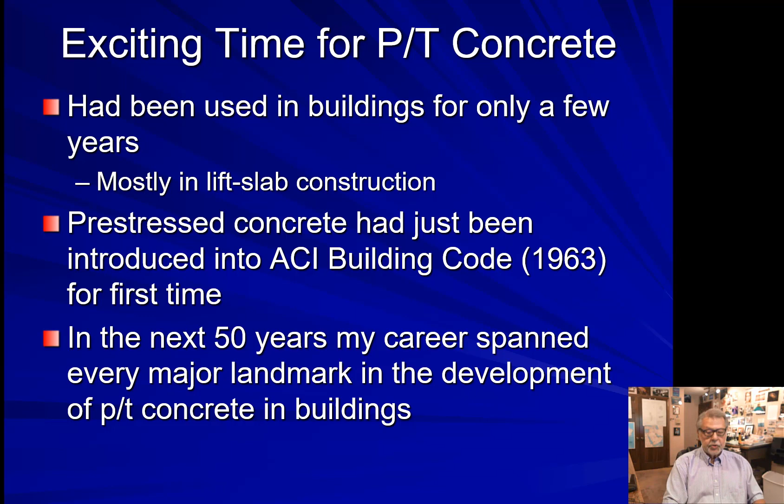It was an exciting time in post-tension concrete. It had been used in buildings for only a few years. The first post-tension buildings were in the mid-1950s, so a little less than 10 years before, and it had been used mostly at that time in lift-slab construction, which we'll talk about later. Prestressed concrete had just been introduced into the ACI Building Code, the 1963 edition, for the first time. As I said, in the next 50-plus years, my career has spanned every major landmark in the development of post-tension concrete in buildings.

It's interesting that the American post-tensioning industry owes its existence to lift-slab construction. The first lift-slab buildings in the United States were built in the mid-1950s, and they used non-prestressed slabs. In lift-slab construction, the first thing that's done is that the columns are erected full height, and they were either steel or concrete.

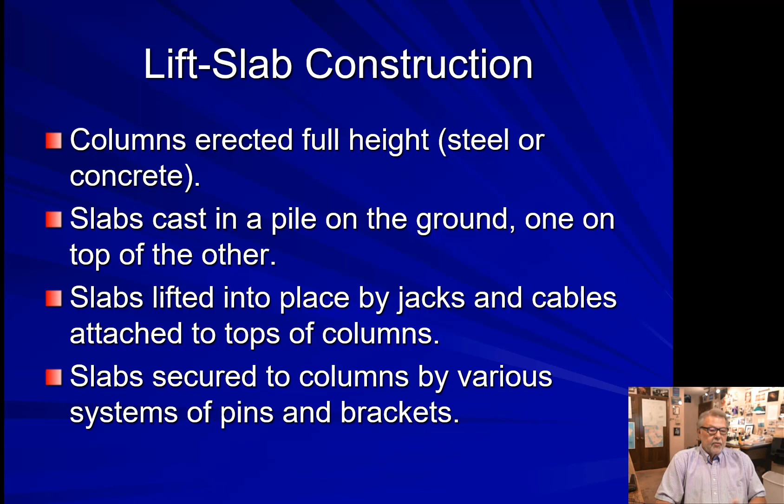The slabs were cast in a big pile on the ground, one on top of the other. Then the slabs were lifted into place by jacks and cables that were attached to the tops of the columns. Then the slabs were secured at each level to columns by various systems of pins and brackets.

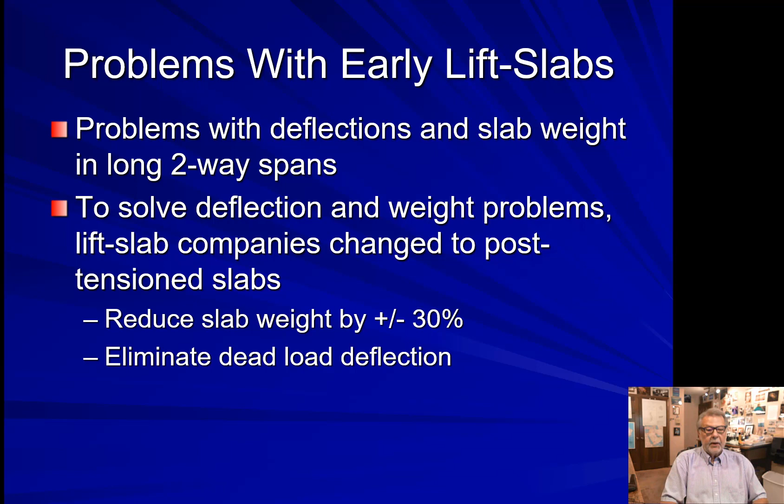It was a highly successful type of construction with a few exceptions. There were problems with deflection and slab weight in the long two-way spans. To solve the deflection and weight problems, the lift slab companies all decided to change to post-tension slabs, because the slab weight would be reduced by about 30%, and it would eliminate most of the dead load deflection.

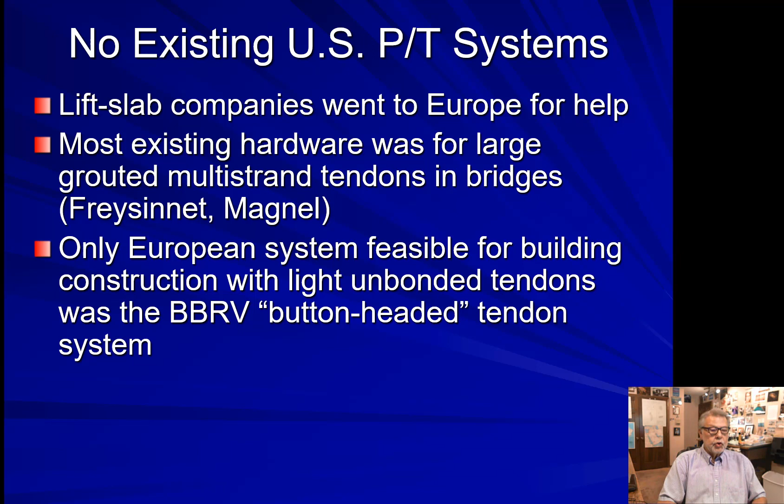The problem was there weren't any existing American post-tensioning systems. The lift slab companies therefore went to Europe for help. Most of the existing European hardware was for large grouted multi-strand tendons in bridges, like the Freyssinet system and the Magnel system. The only European system that was feasible for building construction with light unbonded tendons was what was called the BBRV button-headed tendon system. The B, B, R, and V stood for four Swiss gentlemen who collectively invented the button-headed tendon system. And thus we entered into the button-headed tendon era.

Each lift slab company returned from Europe with a license to market the button-headed tendon system. Some independent companies like Prescon, Ryerson, and a few others also obtained button-headed tendon BBRV licenses just to market the post-tensioning system itself. Here's what it looked like—it was a monstrosity. It consisted of a grouping of quarter-inch diameter wires. They conformed to ASTM.

They were quarter-inch diameter wires, 240 KSI ultimate strength. The wires passed through a steel bearing plate, and then through a circular stressing washer, which was externally threaded so the jack could grab onto it. The wires had cold-formed buttons banged onto the end of them in a mechanical process by impact, and that would hold the force. It would develop the force in the quarter-inch diameter wires against the stressing washer.

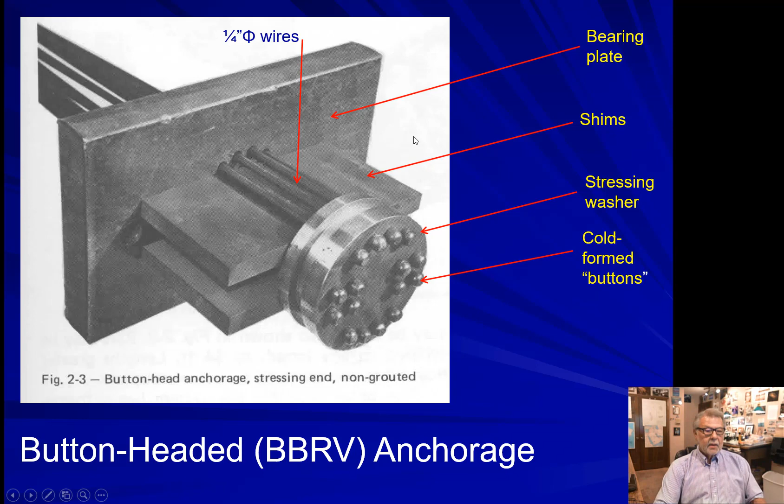Now, you'll notice a couple of potential problems with this anchorage. It solved deflection problems, but the button-headed tendons created other problems. Because both the stressing and dead-end anchors had to be attached in the factory, that required exact length. There was no tolerance for adjustment if the length between forms was wrong.

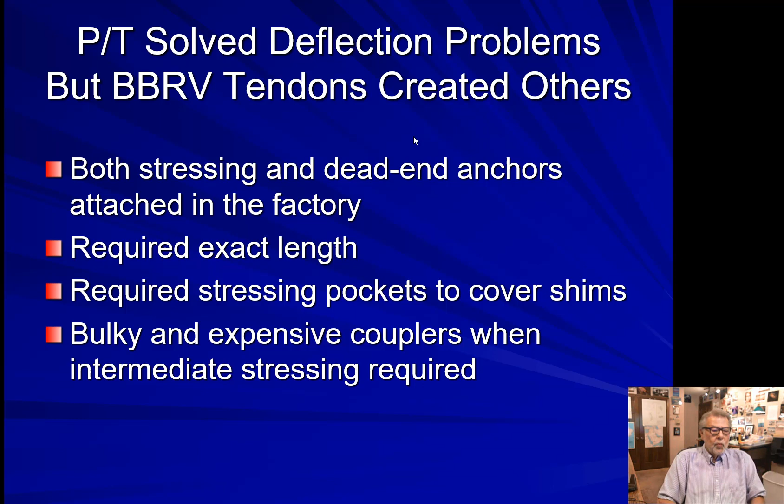They also required stressing pockets to cover the shims. The anchorage couldn't be placed outside the slab; it had to be placed inside the slab and then later covered with either a continuous pour strip or a stressing pocket. It also required bulky and expensive couplers when intermediate stressing was required.

The first strand post-tensioning system was introduced in 1962, developed by one of the most famous names in the history of concrete construction in this country, Edward K. Rice, Ed Rice. He was president of T.Y. Lin and Associates at the time, and T.Y. Lin consulted for precast companies, which all, of course, used 7-wire strand for their pre-tensioning steel.

The strand post-tensioning system was introduced by Atlas Prestressing Corporation, a company I went to work for in 1965, at which time Ed Rice was president of Atlas. He was also president of T.Y. Lin and Associates. The strand system did not require precise length.

The tendons could be cut several feet longer than the concrete length. They did not require stressing pockets, and I'll show you a picture of why that's true. They did not require couplers. If intermediate stressing was required, which it was on almost every project, the intermediate anchors could just be slid onto the strand. The strand was cut the full length of the building, and the anchorages were just slid on to the intermediate stressing point.

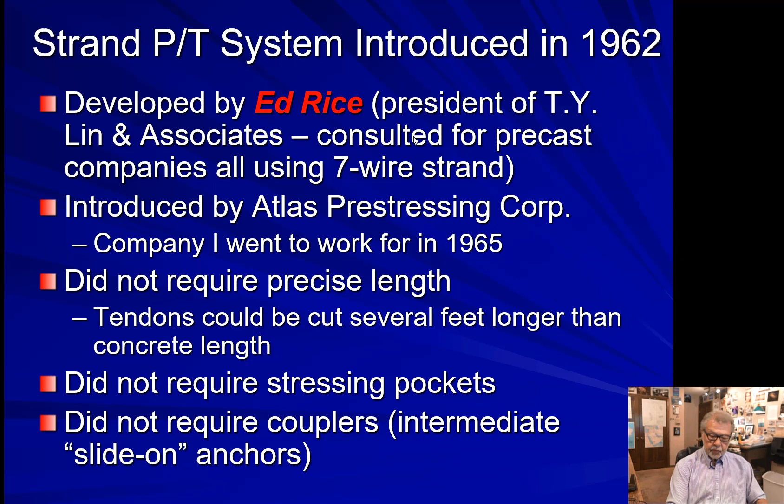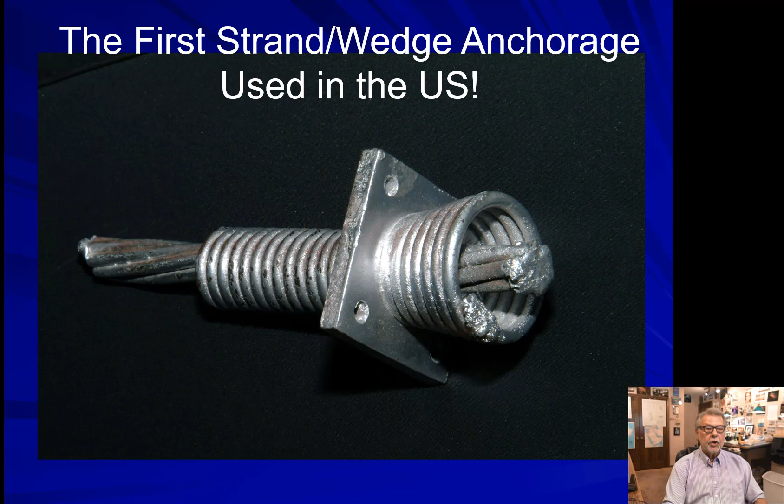The force in the cable is held by two cone-shaped wedges with teeth that penetrate the strand, the 7-wire strand, and the force in the strand is then resisted in bursting by the coil of wires. It's kind of an unusual design, and I think I've talked to Ed about how he came up with it, and it had to do with some large coil-type anchors used by Freyssinet in Europe at the same time. Nonetheless, this was the very first strand wedge anchorage ever used in the United States.

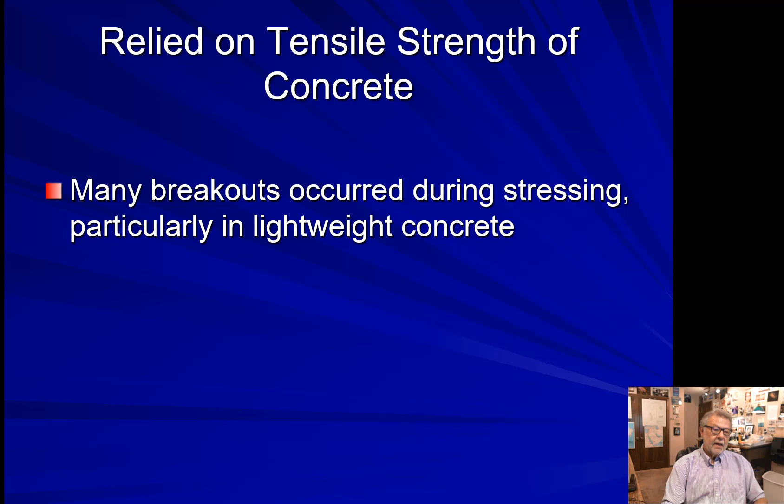Since it relied on the tensile strength of concrete, there were tons of breakouts that occurred in the early days of wedge post-tensioning with the coil anchorages. That was particularly true in lightweight concrete, which was prevalent in building construction at that time.

I remember in the early Atlas days, we would often gather after work and discuss the events of the day. Our field superintendent, Tom Anderson, would often come in and join us, and he would invariably be bruised and bloodied from fixing all the breakouts that occurred during the day. And he would say, referring to the coil anchors, those damn things should be chained together.

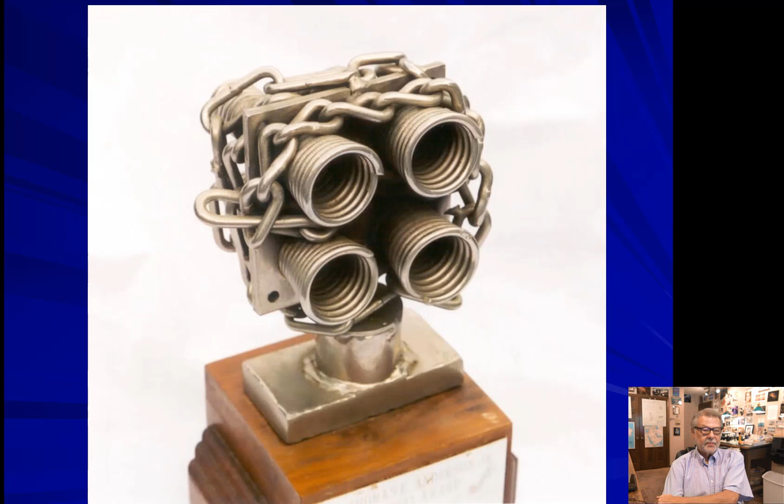Well, that kind of caught on, and it led to the Thomas E. Anderson Memorial Award, which for a number of years at Atlas was presented to the Atlas Employee of the Year at the annual Christmas party. We got a kick out of that. I don't think Ed appreciated it very much, but the Atlas employees enjoyed it.

We had to develop a bearing type anchorage, and that was done primarily by an Atlas employee named Dick Martyr, along with help from Hal Long, president of Atlas. This was the very first ductile iron casting ever made and used in the United States. It was first used in 1963 by Atlas.

It was kind of interesting. We had a basic rectangular shape, 2 inches by 5.5, which gave a gross area of about 11 square inches, less the holes, and that was adequate for stressing at about 3,000 psi. It incorporated the tapered hole, which accepted the wedges. That rectangular shape was designed so it could be used in very thin slabs. There were a lot of 5-inch slabs being used in parking structures at that time, and this 2-inch dimension worked beautifully in a 5-inch slab.

We got what I thought was a brilliant idea to manufacture these things in groups. There was a single shape, a double, the H222, 322, 422, and mostly for beams, we had a group of castings that would accommodate 5. The iron workers used to just love this because you could place a 522, 5 anchorages, for about the same cost as a single anchorage. But it never caught on, and to my knowledge no one has used multiples since Atlas in the 60s.

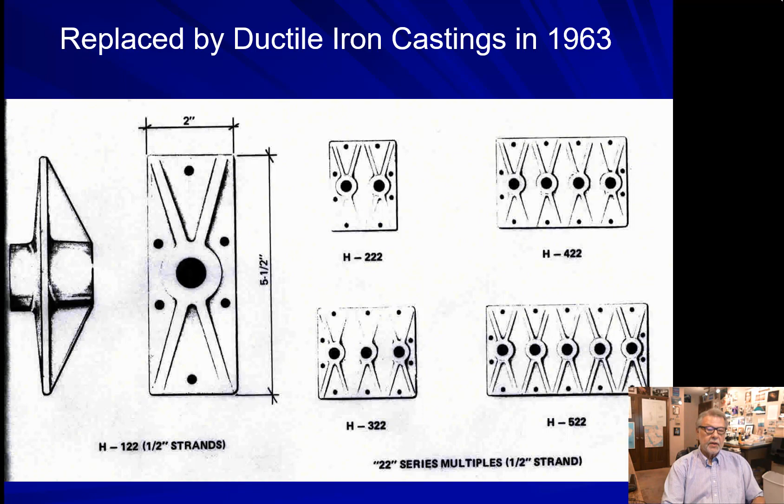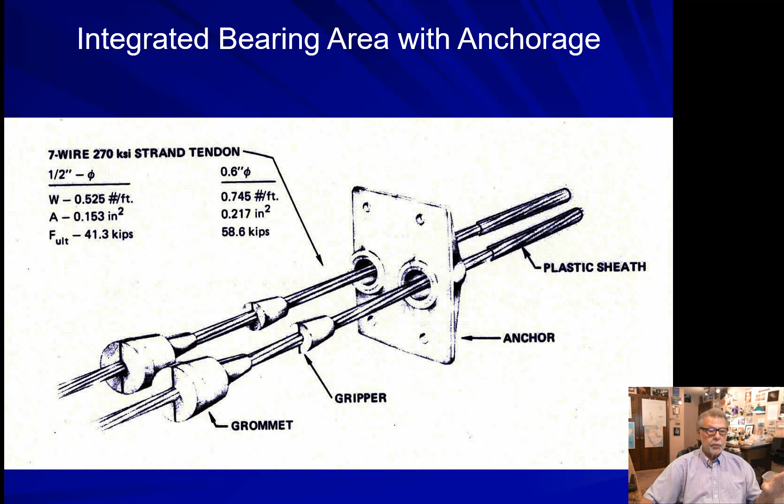Here's what the system looked like. The 7-wire strand passed through the anchorages. The strand was greased and plastic sheathed. These are the grippers, very similar to grippers used today. Our stressing pocket we called a grommet. It was a 2-piece rubber assembly, not the single plastic piece used today, but two pieces. We thought it was easier to handle that way. That never caught on either, but the rest of it did.

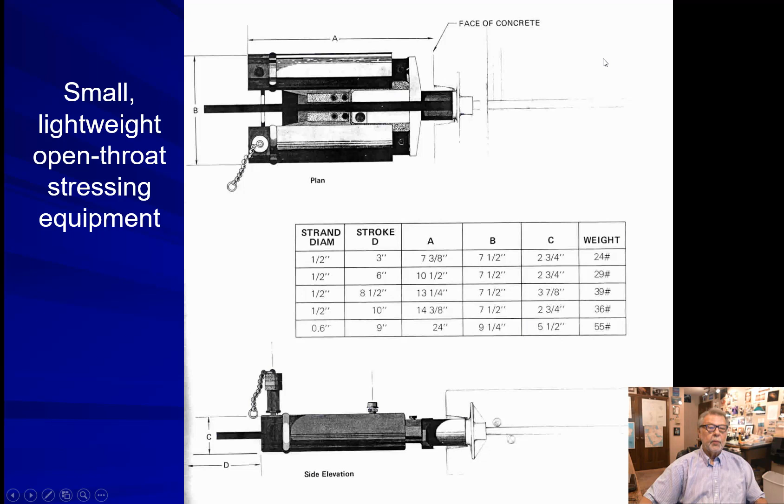We used small, beautiful, lightweight open throat stressing equipment, most of it developed by Dick Martyr for Atlas. You can see how lightweight it was. The typical stroke was 8.5 inches, and it only weighed 39 pounds, so it was easily handled by one iron worker. Again, it was open throated so it could be attached to the strand at any point along its length.

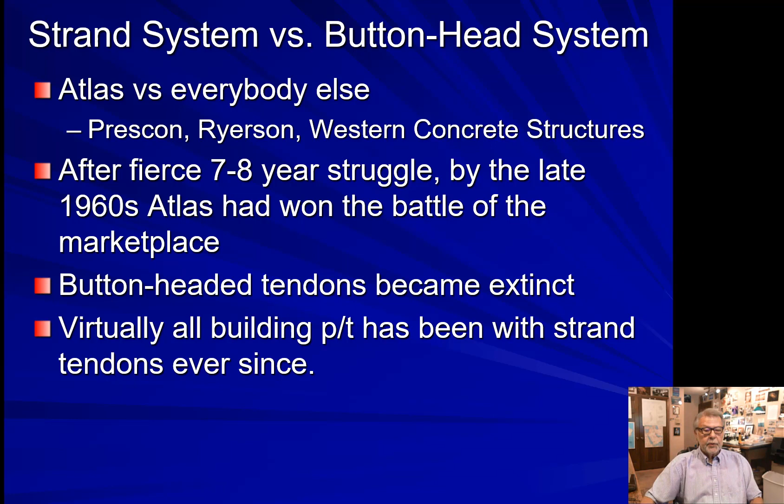For a while there was a vicious commercial battle between the strand system, used by Atlas, and the button-headed tendon system, used by everybody else, including companies like Prescon, Ryerson, and Western Concrete Structures. But after a very fierce, nasty 7 to 8 year struggle, by the late 60s we at Atlas had won the battle of the marketplace, and button-headed tendons became extinct, never used again. Virtually all building post-tensioning has been with strand tendons ever since the late 1960s.

It's interesting to note what happened to lift slabs. I said the post-tensioning industry owes its existence to lift slabs, but we hardly ever see any lift slabs anymore. The problem was one of greed. The lifting companies all had a license to market the button-headed tendon post-tensioning system, so they combined the lifting and the tendons in their bids.

That excluded independent post-tensioning companies that were not lift slab companies, like my firm, Atlas Prestressing Corporation. We couldn't bid on a lift slab job. So independent PT companies were shut out on every lift slab job.

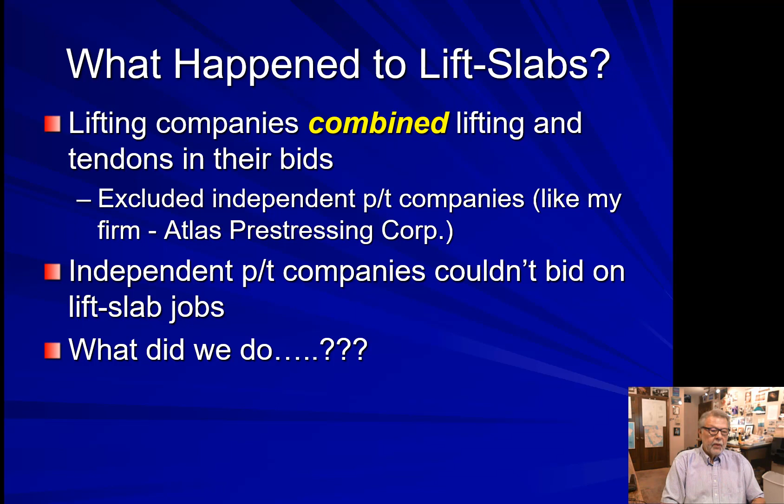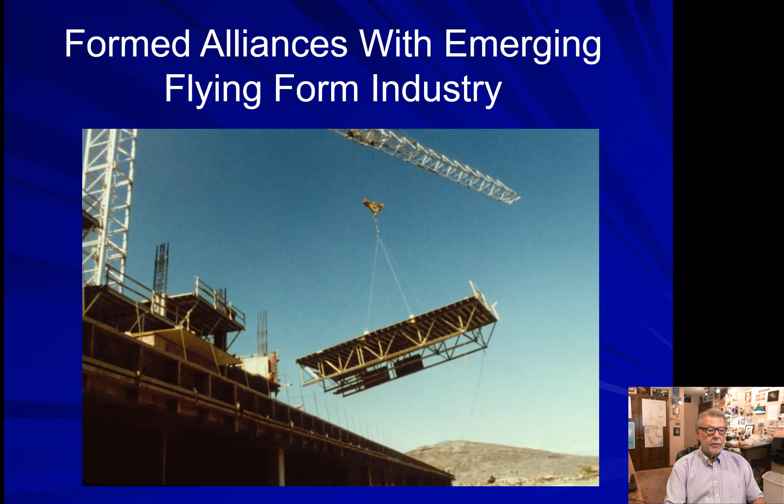What did we do? In one of the better business decisions ever made, we formed alliances with what was at the time the emerging flying form industry. I remember a big, wonderful company called Formies, based in Albuquerque, and we developed a very close relationship with them. Along with very progressive concrete contractors, between post-tensioning companies, flying form companies, and progressive concrete contractors, we could jointly compete directly with lifted buildings.

Cast-in-place post-tension buildings using large panel flying form systems became highly competitive with lifted buildings, and by the late 1960s, cast-in-place buildings became preferred, and lift slab buildings became virtually obscure.

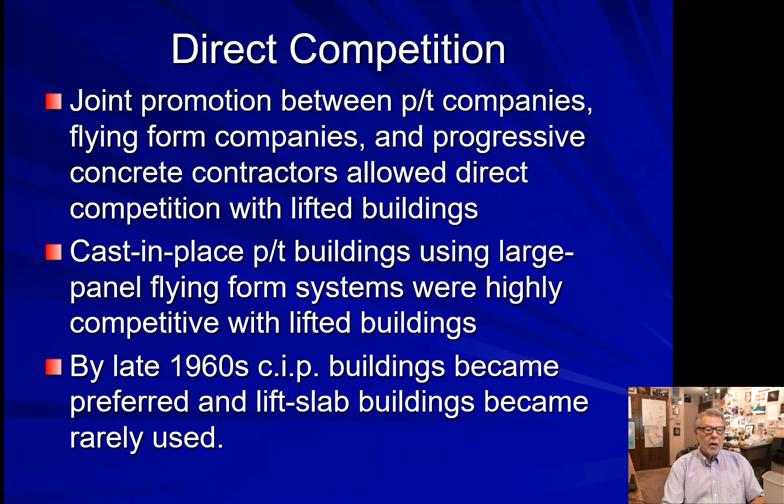I think it was a very short-sighted decision on the part of the lift slab companies. If they had not originally tried to exclude independent post-tensioning companies, it's possible that large panel flying form systems would never have been developed or refined to the extent they are today. And I believe lift slab construction would be a significant factor in today's medium-rise building market. There are some complications in that.

There were some very serious lift slab accidents during construction that may have affected that statement, but I still believe it to be true that lifting was an excellent method of construction. It eliminated forming, which is one of the largest costs in concrete building construction.

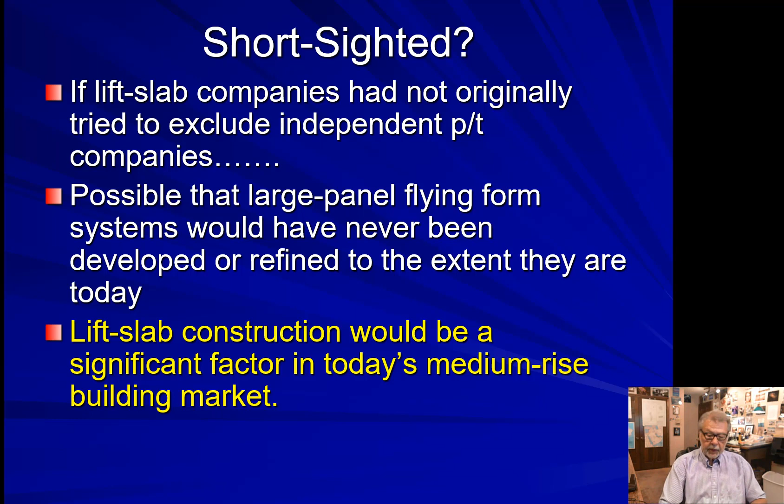Interesting to know how much post-tensioning has been done in the United States. Based on tonnage statistics from the Post-Tensioning Institute that started in 1972, and reasonable estimates of what happened before that, there have been about 5 billion square feet of building construction done in the United States with unbonded post-tensioning. Assuming about 100,000 square feet per building, that means there are about 50,000 post-tension buildings in the U.S., most of which are still in service. And that doesn't include bridges, earth applications, or residential foundations, which is the largest application of post-tension tendons in the country, larger than all other applications combined.

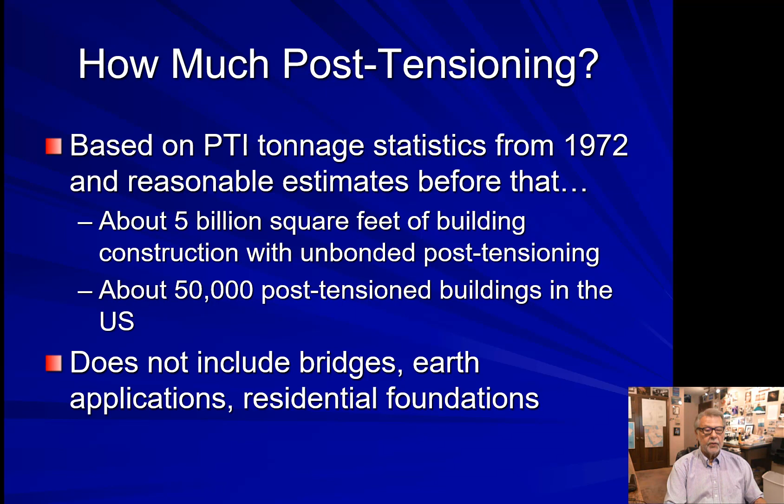Looking back over my half century in the post-tensioning industry, I would say the following are the major landmarks that contributed to the growth of post-tension concrete in buildings. First, the introduction of the strand system, which replaced the button-headed tendon system. Next, the development of the ductile iron casting for single-strand unbonded tendons. We've talked about both of those.

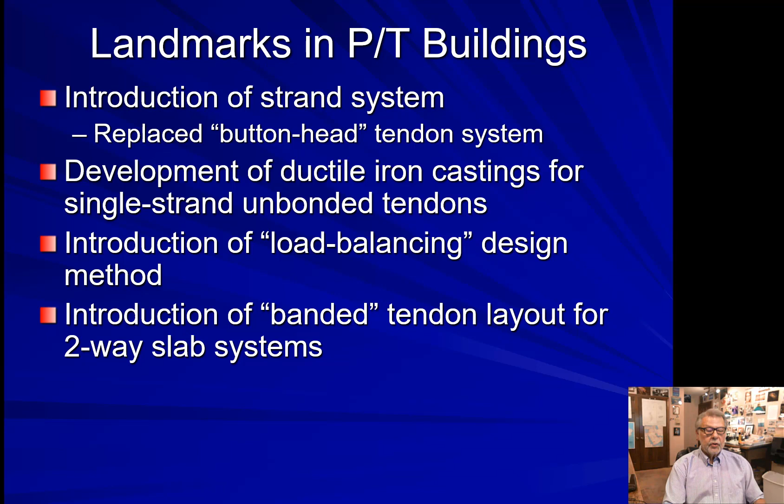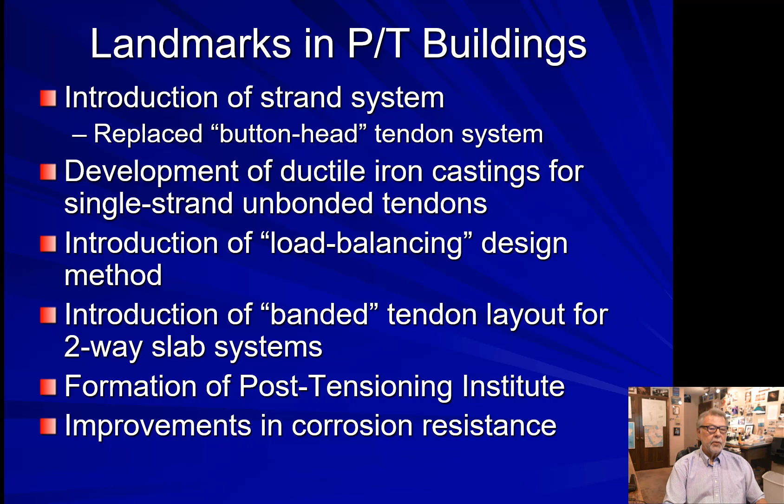Third is the introduction of what was called the load balancing design method, done by T.Y. Lin in a paper that appeared in an ACI journal in 1963. Next came the introduction of the banded tendon layout for two-way slab systems. Finally, the formation of the Post-Tensioning Institute, a tremendously important landmark in post-tension buildings, which led to great improvements in corrosion resistance—the biggest problem the post-tensioning industry ever faced.

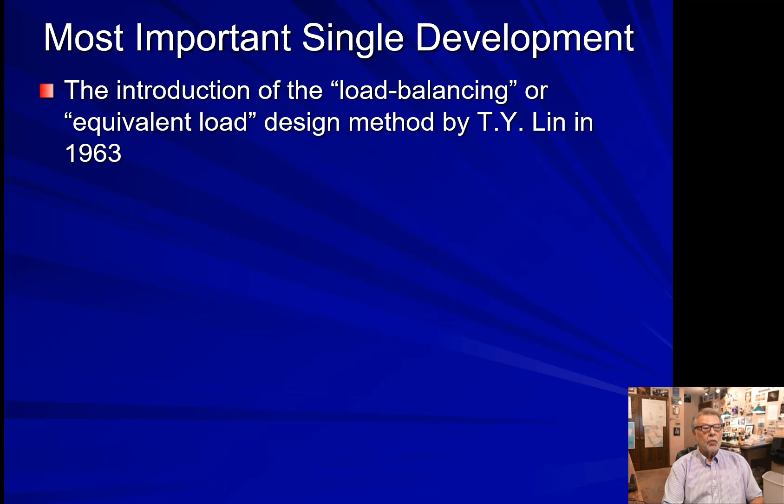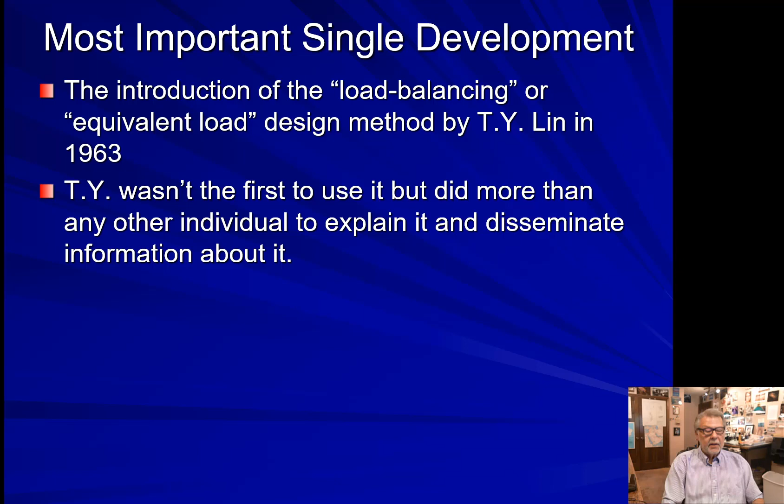What's the most important single development? That's a tough one, but all things considered, I believe the most important single development or landmark in the growth of the post-tensioning industry in the United States is the introduction of the load balancing method by T.Y. Lin in 1963. It's also called the equivalent load design method. T.Y. wasn't the first to use it, but he did more than any other individual to explain it and disseminate information about it. It made the design of prestressed concrete as easy as the design of non-prestressed concrete.

The tendons became just another load. Once you remove the tendon and replace it with the loads that it exerts on the concrete, now you've just got a concrete member with a system of loads. Some of them go in unusual directions, but they're still just loads. That made a huge difference for designers, and it encouraged the selection of post-tensioning as the preferred structural system.

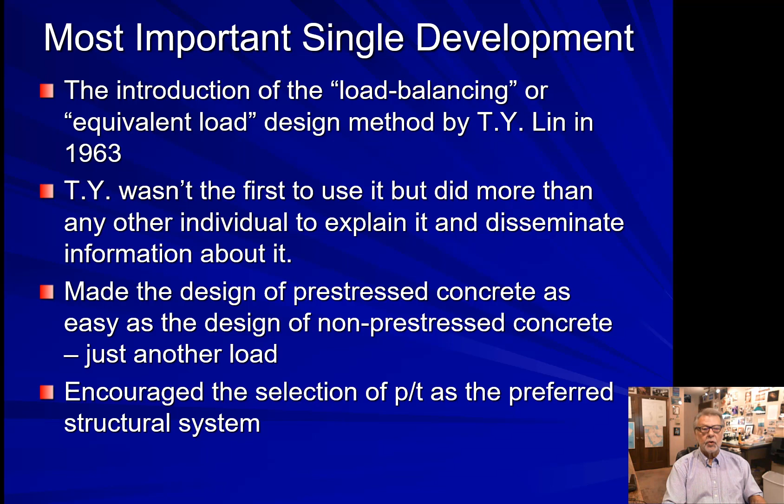Building codes, of course, are extremely important. Structural engineering is one of the few professions in the world that is completely governed by laws—no other profession that I'm aware of is completely governed by laws, but structural engineering is. Post-tensioning was virtually absent from the 1971 version of the ACI building code, ACI 318-71. In fact, in that code, the structural engineer was told to ignore secondary moments. It's the only code requirement I'm aware of in my entire career that requires a violation of statics.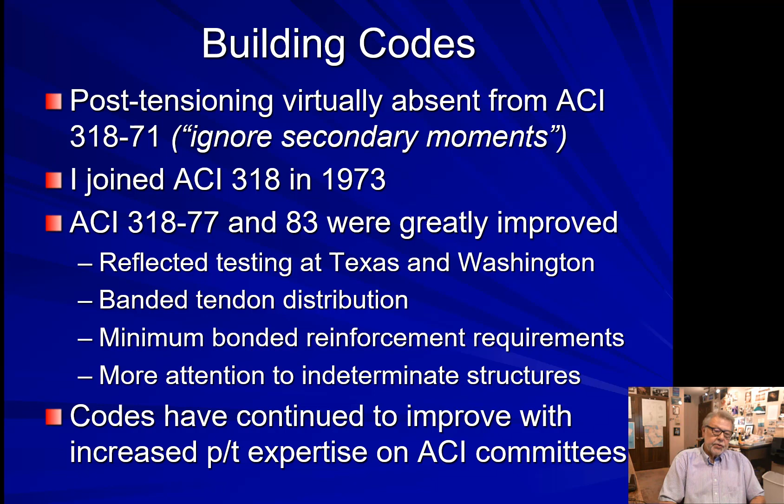I joined ACI Committee 318 in 1973. Partially because of my influence, the next two codes were greatly improved, in '77 and '83. They reflected testing on banded two-way slabs at the University of Texas, and post-tension beams with both unbonded and bonded tendons at the University of Washington. They addressed the banded tendon distribution, minimum bonded reinforcement requirements in both beams and one- and two-way slabs, and paid much more attention to indeterminate structures, which includes most post-tension members. The codes have continued to improve with increased expertise on ACI committees.

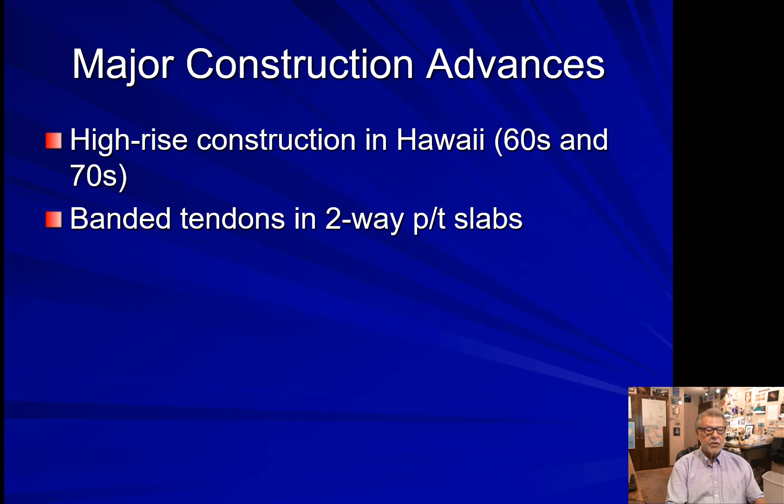I consider several major construction innovations and advances to have occurred during my career, and perhaps the two most significant were what happened in high-rise construction in the state of Hawaii in the 1960s and 70s, and of course the introduction of the use of banded tendons in two-way post-tension slabs.

Here's the reason—timing was just everything. At that time, there was a huge input of foreign investment. Both China and Japan started to look at Hawaii as a very favored vacation spot, and they wanted to cash in on the opportunities for providing hotels and condominiums in the islands. So there was a tremendous construction boom in the islands at that time.

It was a very slow time on the mainland, but it was booming in Hawaii at that time, both in high-rise hotels and condominiums. The faster you could get these buildings completed meant the quicker you could get them rented or sold, and that meant more revenue.

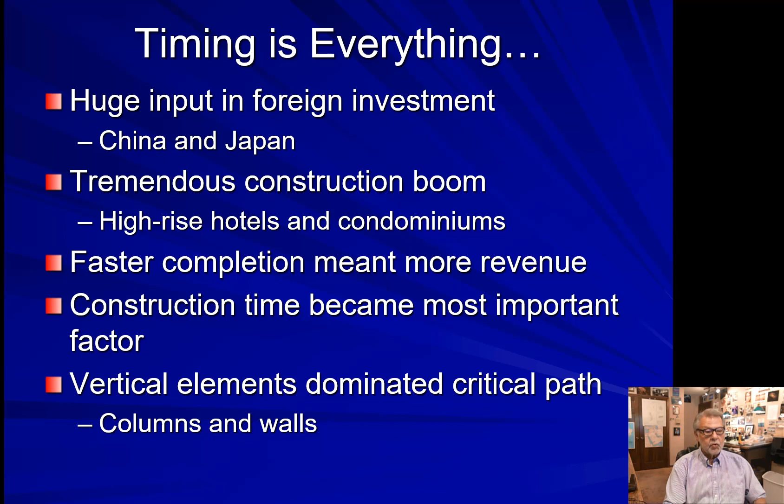So construction time became the most important factor, certainly top of the list. Now in these high-rise buildings, the vertical elements, the columns and walls, dominated the critical path. You couldn't build the next slab until the columns and walls were completed to the soffit of that slab. So what's the solution? Build the columns and walls out ahead of the floors. And thus the era of jump forms and flying deck forms arose.

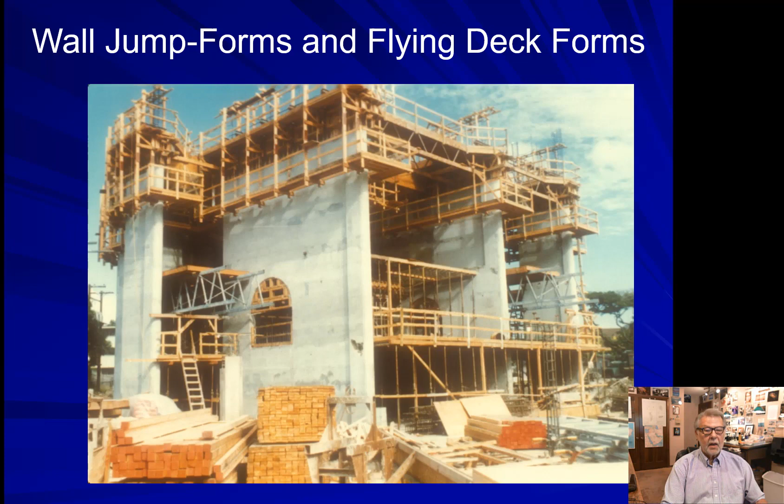This is a multi-story building just starting out in construction. You can see none of the elevated floors have been cast yet, but the walls and columns are up about 3 levels. How do we do it?

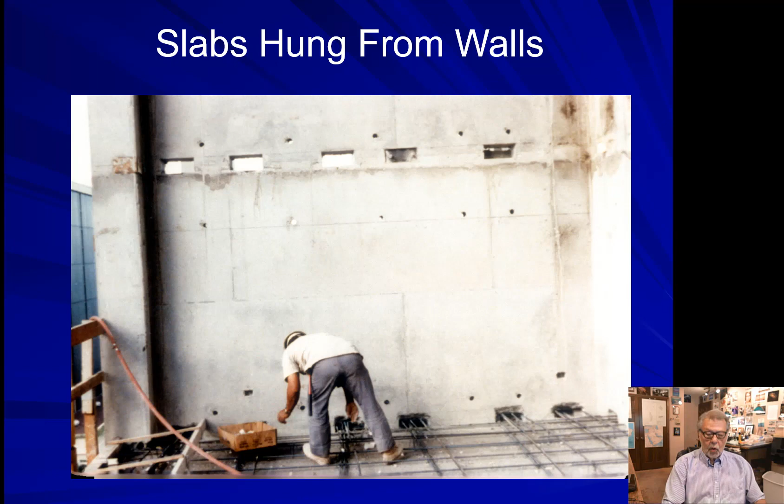Well, we hung the slabs from the walls. We provided holes — the Hawaiian word for a hole is a puka. We provided pukas through the wall through which the slab reinforcing passed, and that was fully adequate to support the slab from the walls after the walls had been erected above the slabs.

With this type of construction, we could actually get the schedule down to 3 days per floor, which was spectacular. In a typical schedule, the slab concrete would be placed on a Monday morning. The walls and columns, remember, are 2 or 3 lifts above. The tendons would be stressed on a Tuesday morning, one day. Oversized 4x6 anchors were used to allow stressing at 1500 psi, which we could achieve in 24 hours.

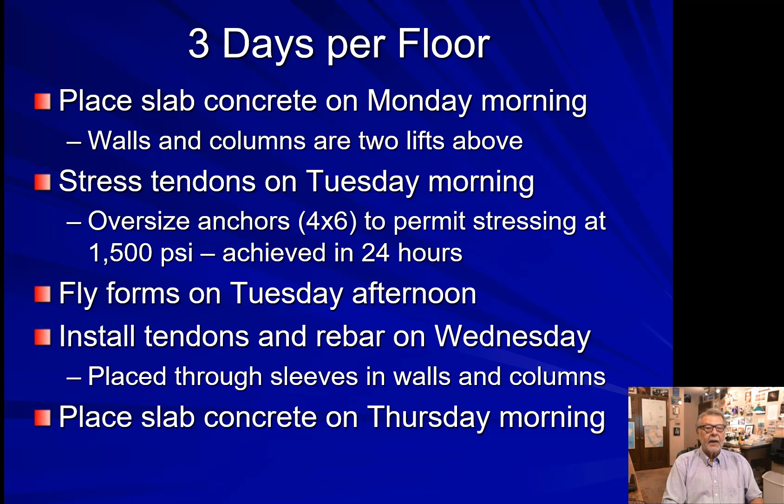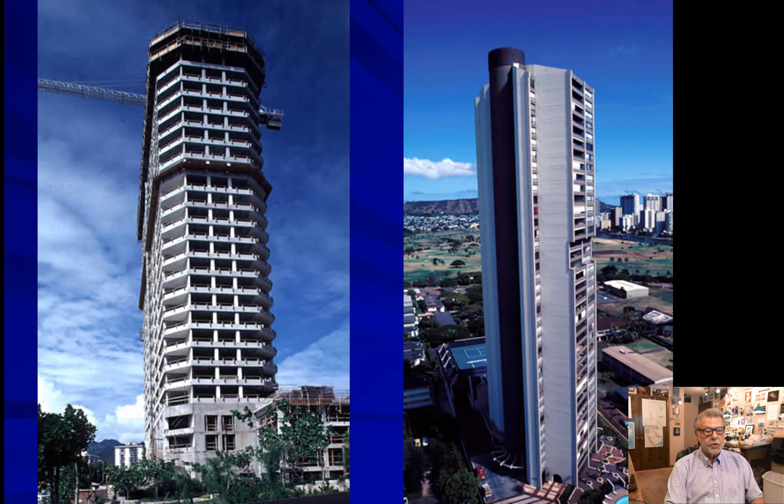The forms would be flown. Once the deck is stressed, it's structurally adequate, so the forms could be removed and flown Tuesday afternoon, set above the stressed slab. The tendons and rebar would be installed on the next slab Wednesday morning, again placed through sleeves in the walls and columns. The slab concrete would be placed Thursday morning — Monday, Tuesday, Wednesday, Thursday, a 3-day cycle. We did a bunch of beautiful multi-story buildings in the 40 to 50 story range in Honolulu in that time period, all using some type of jump form, slip form system where the walls and columns were built out ahead of the slabs.

The next major construction advance was the introduction and development of the banded tendon system in two-way slabs. It's interesting, it was first used in the most famous post-tension concrete building ever built — not because it's post-tension, but because of what happened there. It's the Watergate Apartments in Washington, D.C., completed in 1968.

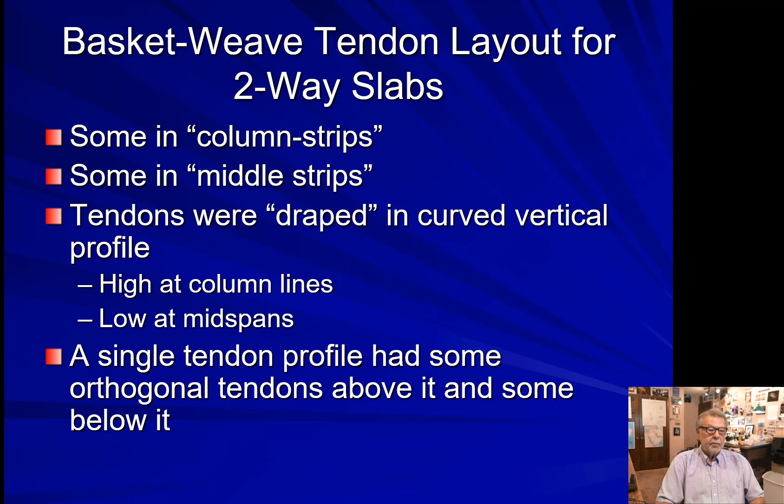At that time, a system called the basket weave system, a tendon layout, was being used for two-way slabs. Some tendons were in column strips, an imaginary strip centered on the column. Some were in middle strips, the area of the slab between the column strips. The tendons were draped in a curved vertical profile, high at the column lines and low at midspans. So a single tendon profile had some perpendicular tendons above it and some below it.

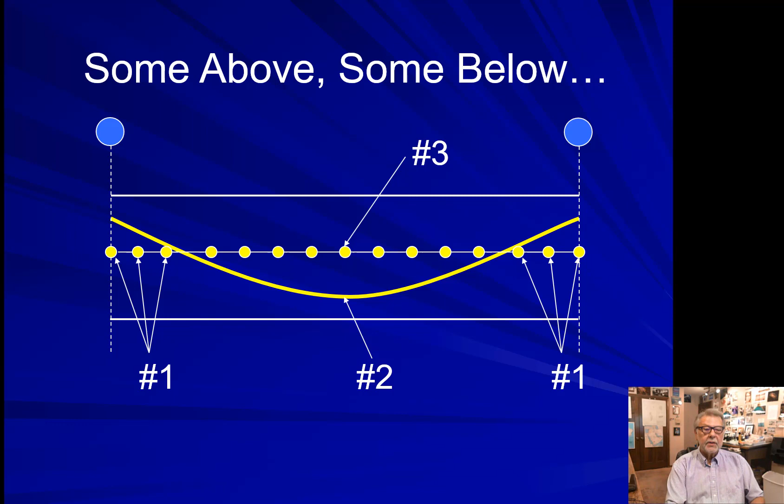And this is what that looked like. In this section, the tendons near the column at any one point in the slab would have only tendons above, meaning they were sequence number 1 — they had to be placed first. Then the tendons in the perpendicular direction that passed directly above sequence 1 but below sequence 3 had to be placed — that was sequence number 2. Then the rest of the tendons were sequence number 3. You had to place them in this sequence or you couldn't chair them properly — you'd get a bird's nest of chairing.

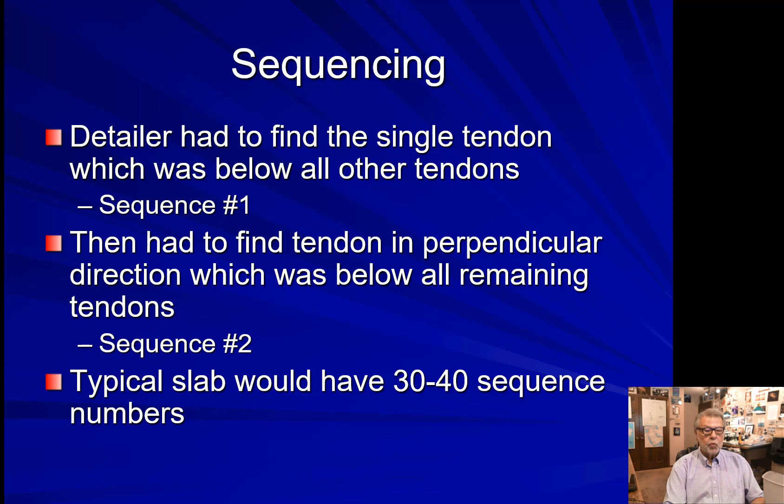So the detailer in that time period with the basket weave tendon system had to find the single tendon which was below all other tendons — that was sequence number 1. Then he or she had to find the tendon in the perpendicular direction which was below all the remaining tendons — that was sequence number 2. A typical slab, even a relatively simple one, would have 30 to 40 sequence numbers.

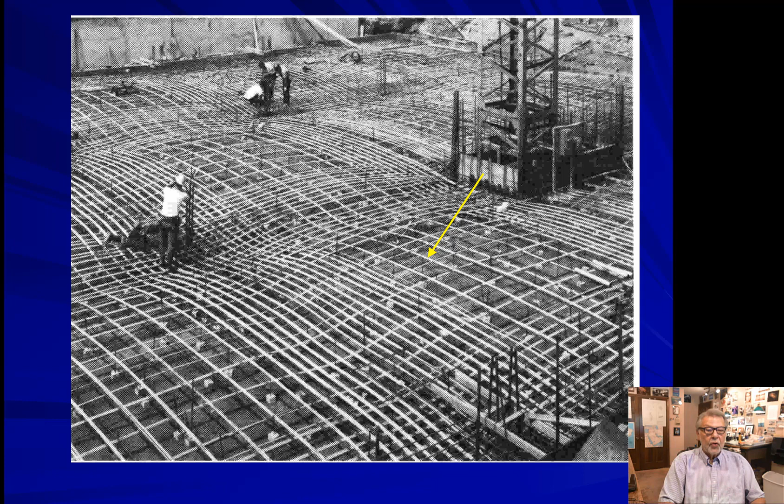Again, the tendons had to be installed in a precise sequence, and any error in the placing sequence resulted in a bird's nest when it was chaired. You'd have to pull the tendon out and rethread it.

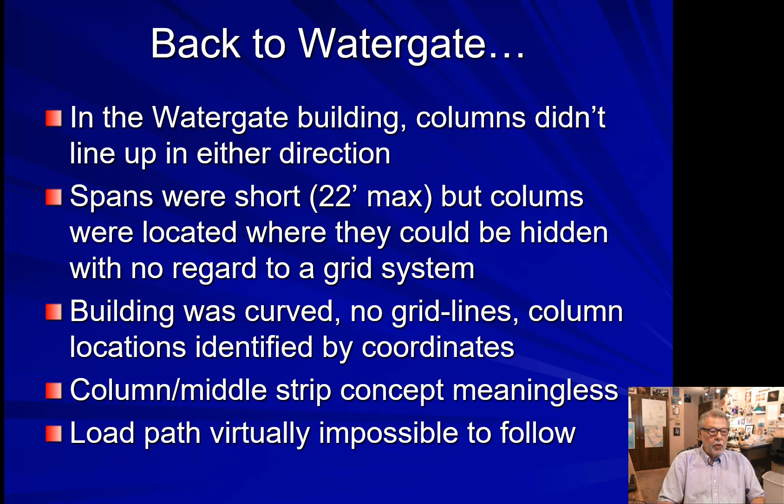Back to Watergate. In the Watergate building, the columns didn't line up in either direction. The spans were very short, only about a 22-foot maximum span, but the columns were located where they could be hidden with no regard to a grid system at all. The building was curved to further complicate it, so there were no grid lines. The column locations were actually identified by coordinates in Watergate. The column middle strip concept, of course, was meaningless, and the load path was virtually impossible to follow.

So what did we do? The slab design engineers were a conglomerate of T.Y. Lin and Atlas Prestressing Corporation. It was a design-build project.

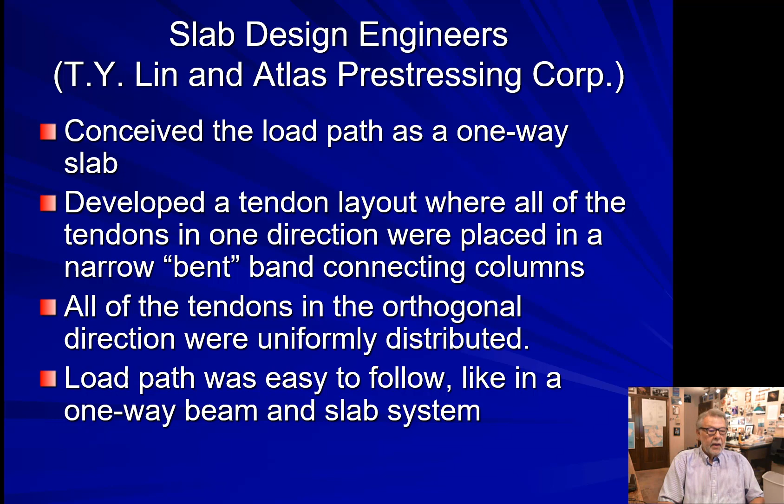We conceived the load path in the only way we could, as a one-way slab. We developed a tendon layout where all of the tendons in one direction were placed in a narrow, bent, curved band connecting columns, like a beam. And all of the tendons in the orthogonal direction were uniformly distributed. Now the load path was easy to follow. It was really just like a one-way beam and slab system. It worked. It was scary, but it worked.

And it had a number of fringe benefits. It resulted in a substantial savings in labor costs. The placing contractor, the tendon and rebar contractor, was ecstatic about it. He said that, of course, it eliminated tendon sequencing. All the band tendons get installed first, then all the uniform tendons get installed next.

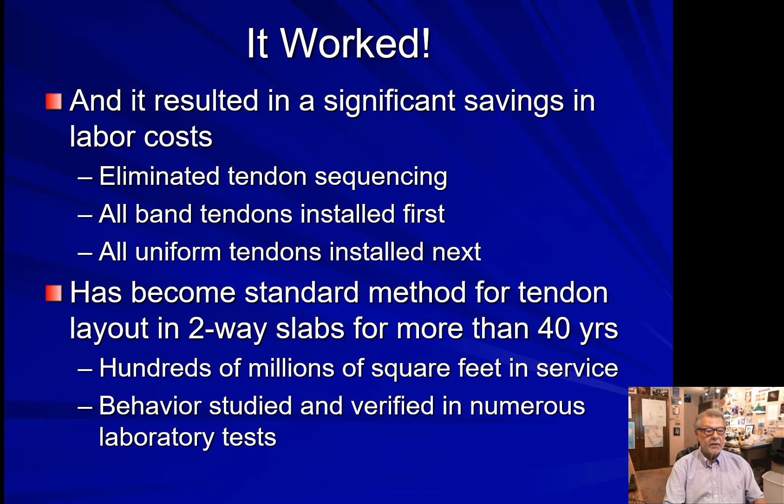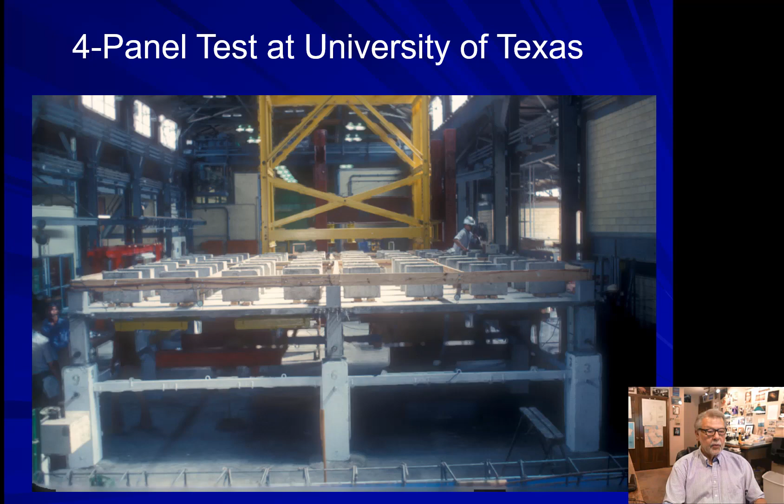This was a picture I took in the early 70s of a 4-panel test at the University of Texas at Austin, conducted by the famous and revered researcher and professor Dr. Ned Burns.

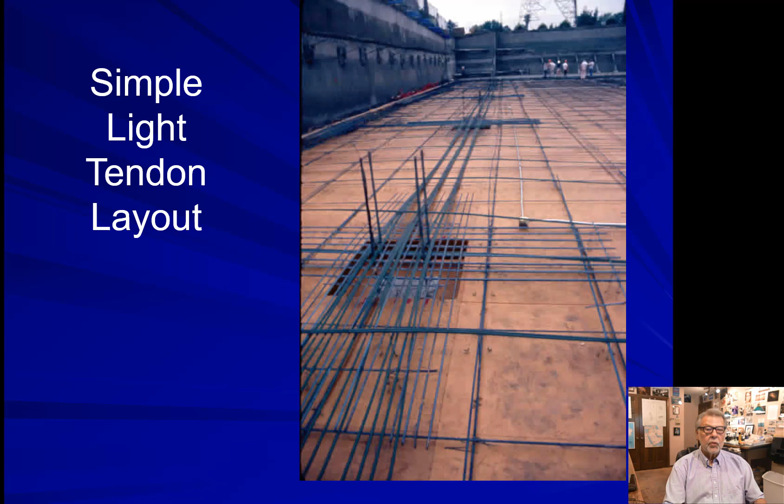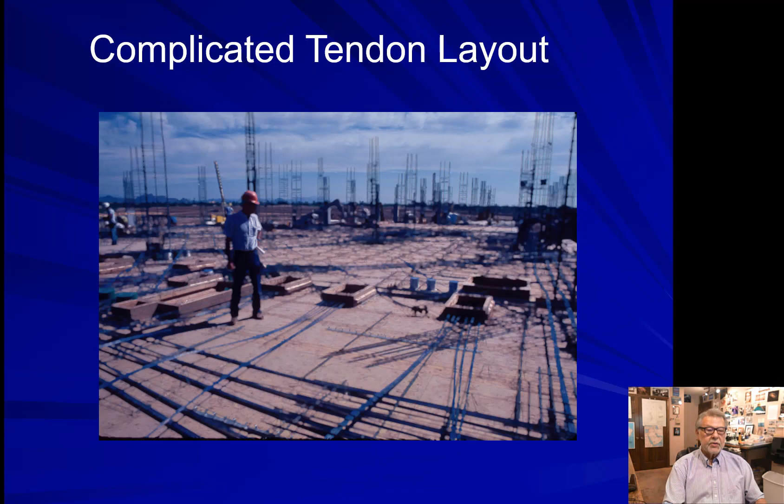Now, I like this one. No discussion of the history of post-tension concrete could possibly be complete without a discussion of the use of computers in post-tension concrete design. When I graduated from UCLA in 1963 and started my first job with T.Y. Lin and Associates, this was my primary mathematical tool.

It was a slide rule. It could multiply and divide, but it didn't know where the decimal point was. I had to figure that out.

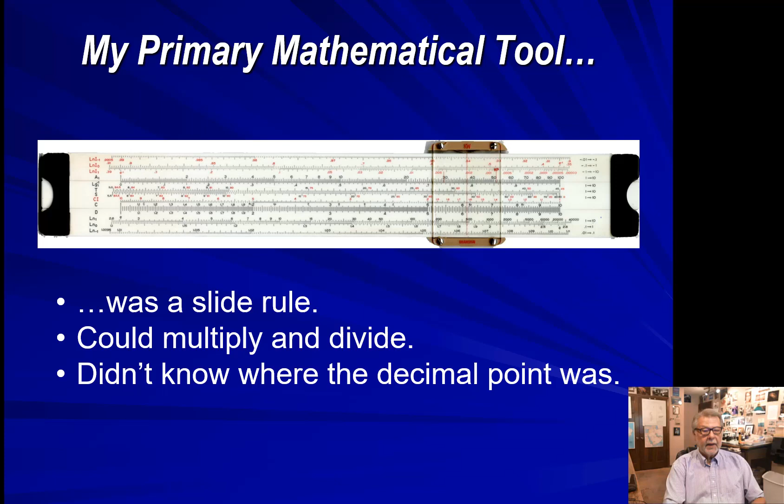Now I can do a dynamic analysis of a 40-story building on a flight between San Francisco and Los Angeles on a laptop computer about the size of a book while sipping a glass of Cabernet. I'm just kidding. Of course, I'd never do that. It would probably be Merlot. No, with all the decimal points in exactly the right place.

This was my first introduction to machine-assisted calculations. This was the Olivetti Programma 101, which was introduced in 1966. I was with Atlas at the time.

We did a tremendous amount of design at Atlas, along with supplying the tendons. We recognized that the most effective way to market post-tensioning was to teach engineers how to design it. So we had a large staff of over 100 licensed engineers at Atlas, and we would provide both design-build services and design assistance for structural engineers in their office.

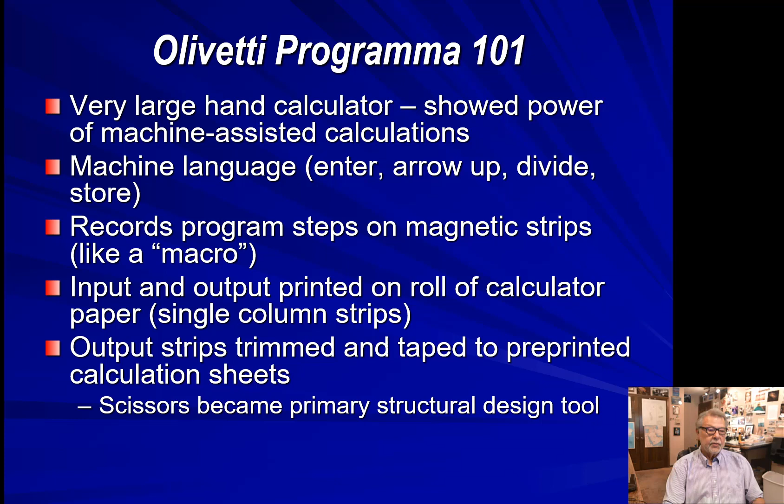Here's what our pre-printed sheets would look like. Note this was done in 1972, and I had the audacity to call this a computer example. This was from Atlas.

We would pre-print the variable titles on the calc sheet. There was a calc sheet for a beam and for a slab. For example, in the upper left hand corner, we would have the load criteria, the slab thickness, the width of slab, the depth, the tributary - all of the important variable parameters for the slab.

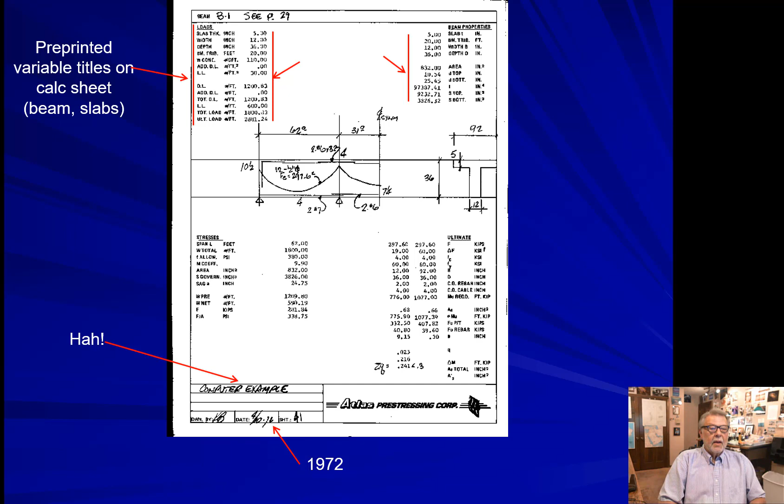Then we would run the calculations on the Olivetti. We would trim the paper output and glue or tape it to the pre-printed calculation sheets in the proper form. Again, this was a big improvement over doing calculations by hand.

The next major landmark in computers was the introduction of the Wang 700 series, called computers, in 1970. It was a very large supercalculator, still machine language - enter a number into the X register, arrow up to the Y register, do something, store it. It could record the program on audio cassette tapes, which had much more capacity, but it was read-only - you couldn't write to the tapes. It had more registers, places to store stuff, and you could print with a modified IBM Selectric typewriter, so you had the advantage of columns and a much prettier format.

With the Wang 700, we could write a crude analysis program in a series of independent routines. The answers and some of the repeated input from one routine had to be used in the next routine, so there was a lot of reuse of numbers. It was not a design program.

You couldn't do a true design. You had to do a series of analyses to get to a design answer. You would input a first guess at geometry, force, and profile. The machine would perform an analysis, calculate stresses and rebar. If you weren't happy with that, you'd change something and do the analysis again, iterating to an acceptable design.

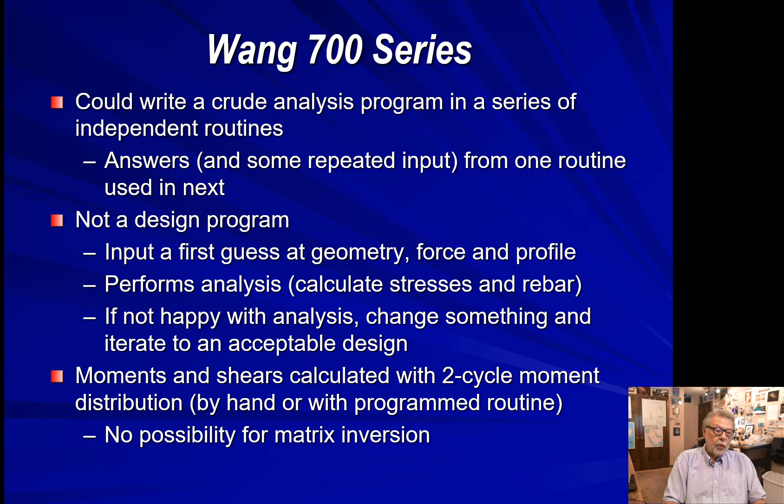The moments and shears were calculated with a 2-cycle moment distribution routine, either by hand or with a programmed routine. There was, of course, no possibility for matrix inversion.

The first real personal computer appeared in 1973 - the Wang 2200. It had, for the first time, a basic language, a basic interpreter. Now we could do loops, decisions, if this then. It had a mighty 4 kilobytes of RAM, so it required tedious programming.

You would input some data, do some calculations, print the answers with a Selectric typewriter, delete the unneeded data, input some more data, and do some more calculations. So it was tedious, but again, it was better than doing it by hand.

The program code was recorded on audio cassette - read-only. The output again was printed on 8.5 by 11 sheets with a modified Selectric typewriter, which meant we could use tabular format with alpha headings. The output became much more usable, and all subsequent programming became easier. If you could program the Wang 2200 with 4 kilobytes of RAM, you could program anything.

1981 changed the world. IBM came out with the first personal computer, the PC. It had 2 floppy disk drives, a monitor, and you could print to a dot matrix printer. It allowed you to read and write to the 2 floppies. It had 64 kilobytes of RAM, a processor speed of 4.77 megahertz, did not have a hard drive, and it did have a basic programming language which was developed by Microsoft.

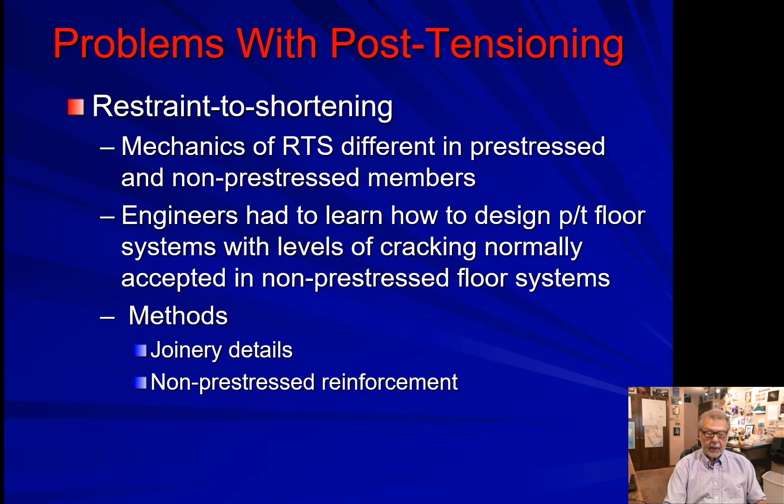It was not mathematics. Math didn't solve this problem. The thing that solved the shortening problems were joinery details like slip joints and pour strips, and the effective use of non-prestressed reinforcement that would distribute the cracking that did normally occur.

But by far the biggest problem that has ever been faced by the post-tensioning industry is tendon corrosion. The early sheathing and grease was inadequate for the aggressive corrosion environments—environments primarily where de-icing salts are applied to the concrete, or in ocean environments.

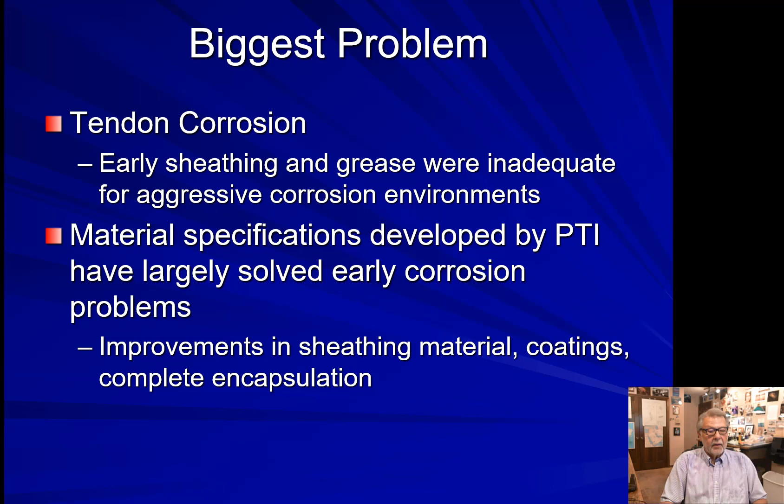Now, improved material specifications developed by the Post-Tensioning Institute have largely solved the early corrosion problems. That includes improvements in sheathing material, in coatings, and finally the complete encapsulation of the tendon.

What's in the future? Well, from my standpoint, after 50 years, what I've been doing up to this point is looking backwards. Now I'll take a little look into the future. I think there are two major things that I see that will change the post-tensioning industry in the future.

The first is the strengthening of existing buildings with externally applied post-tensioning tendons. It's a very green concept. It involves retrofit of existing buildings versus replacement, and that extends the useful life of a building, which fits well into our world of sustainability.

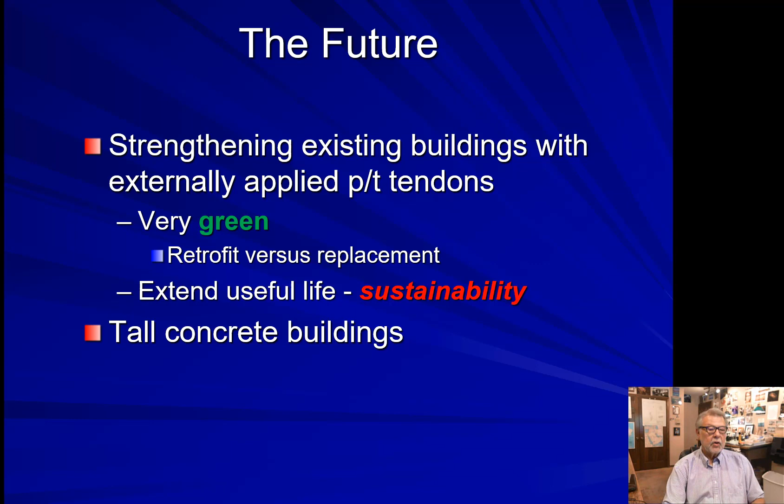The second thing that I see in the future, a huge area of growth, is in tall concrete buildings. Strengthening with external post-tensioning is really exciting—it's a fantastic area. Our firms have completed over 70 projects with external post-tensioning.

They have been very, very successful, and in many cases they saved the building from being demolished. External post-tensioning systems involve building a king post truss under the structure.

We drill through the existing structure, and apply what we call a saddle, which is a structural steel assembly, at the point where we want to apply the beneficial load to the structure.

We string the tendons through the holes that we've drilled, below the saddle. Once the tendons and the saddles are in place and all the anchorages are in place, we stress the tendon.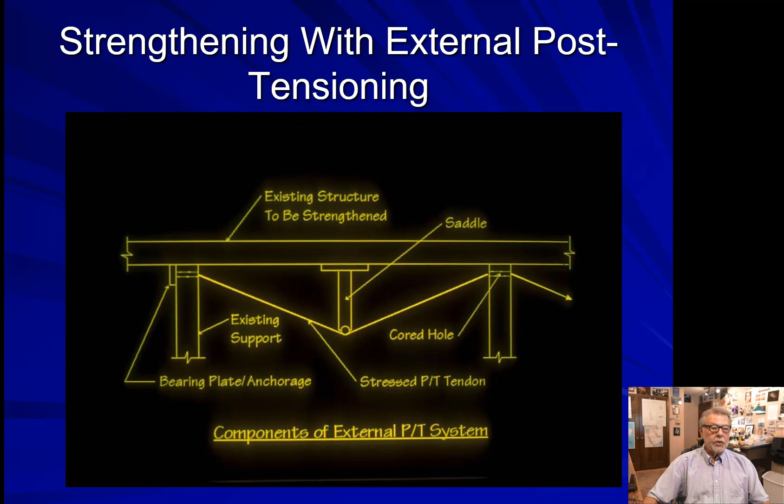It tries to straighten out, but it can't because it's got this saddle, and in coming to equilibrium, it applies a very beneficial load at just the right place on the structure, which increases the strength and remedies any deficiencies.

Here's an example of a completed project that we did decades ago. This is in Reseda, and this one is fireproof. This is a two-way slab.

This is the load being applied in the center of the bay. That load is applied by these post-tensioning tendons, which come over to the adjacent column line and apply their load down to another saddle, which is picked up by a tendon that carries its load to the columns.

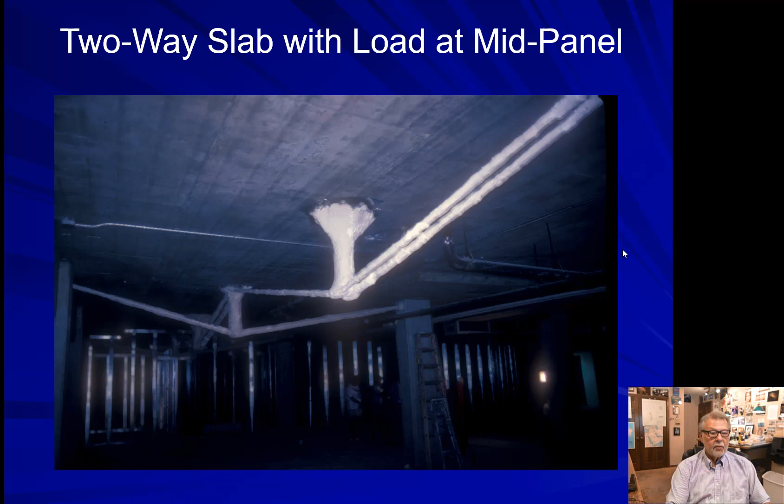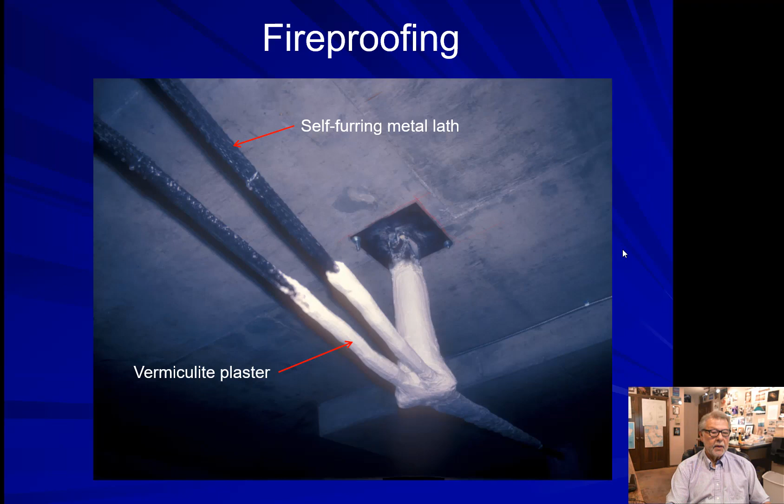This project was fireproof. We've done many projects that do not require fireproofing. The fireproofing here was done with a vermiculite plaster, applied to a self-furring metal lath, which is wrapped around all of the exposed portion of the system.

The other development that I see in the future for post-tensioning is in the construction of tall buildings. There's a historic perception among structural engineers, architects, insurance companies, and contractors that tall buildings must be built with structural steel. What's a tall building? Probably more than 20 stories by my definition.

The use of high-strength concrete makes the column sizes reasonable, and the use of post-tensioning reduces the weight of the floor systems by about 30%. That results in savings in all of the load-carrying members: the columns, the foundations, and the seismic system, either the frame or shear walls.

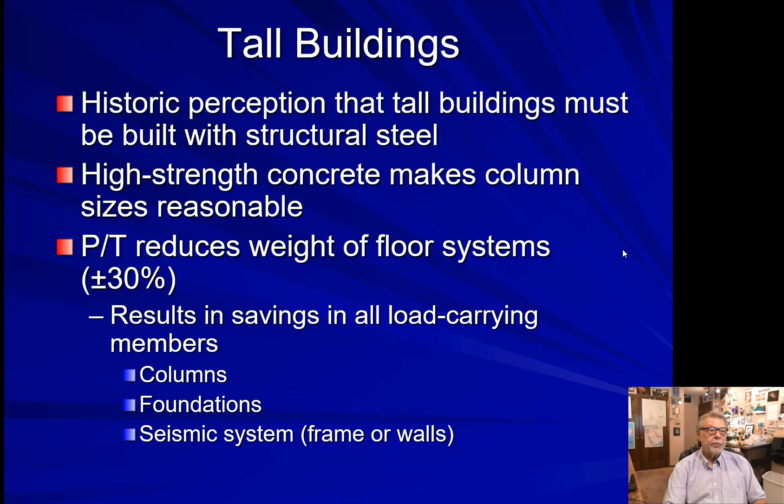The biggest advantage in the use of concrete in tall buildings is cost. There's a reduced height and volume. You can expose the exterior frame beams and columns, resulting in significant savings in curtain wall.

There are advantages in fire and blast resistance, and any catastrophic load resistance, in an indeterminate concrete building. Concrete is inherently fire resistant.

You can expose the exterior beams and columns, and that eliminates the vertical path for fire from floor to floor between the edge of the structural floor system and the curtain wall in a structural steel building. That has caused significant problems in structural steel buildings, as fire is allowed to transmit vertically from floor to floor.

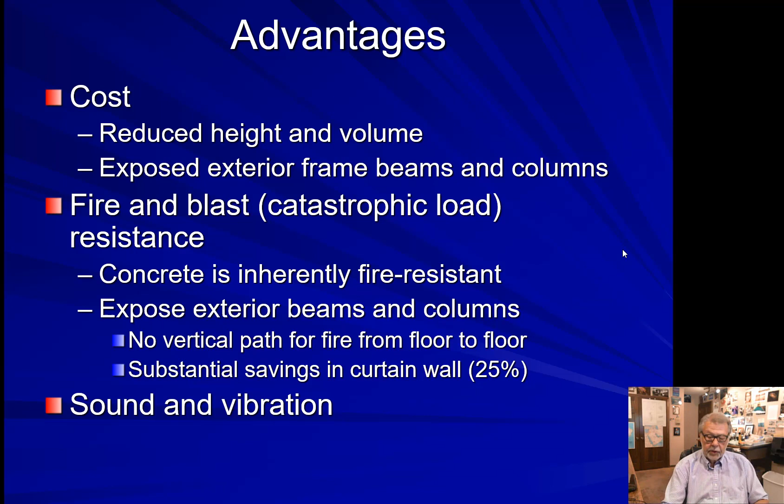And of course, it results in a substantial savings in curtain wall, about 25%. There are additional advantages in sound transmission and in vibration.

Here's one that is very personal for me. This is a building located at 3900 Alameda Boulevard in Burbank, California. At the time it was built, in 1988, it was the tallest concrete building ever built in seismic zone 4 - now seismic design category F, the most severe seismic category at the time of construction. I wrote an article in the PTI Journal a few years ago on this building.

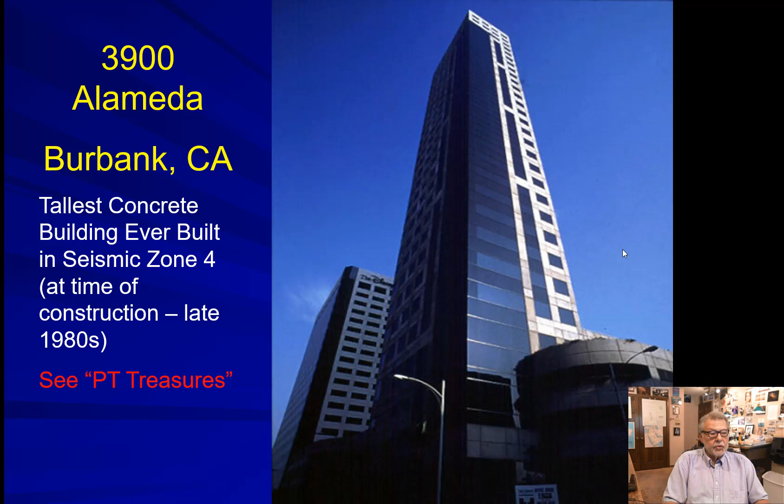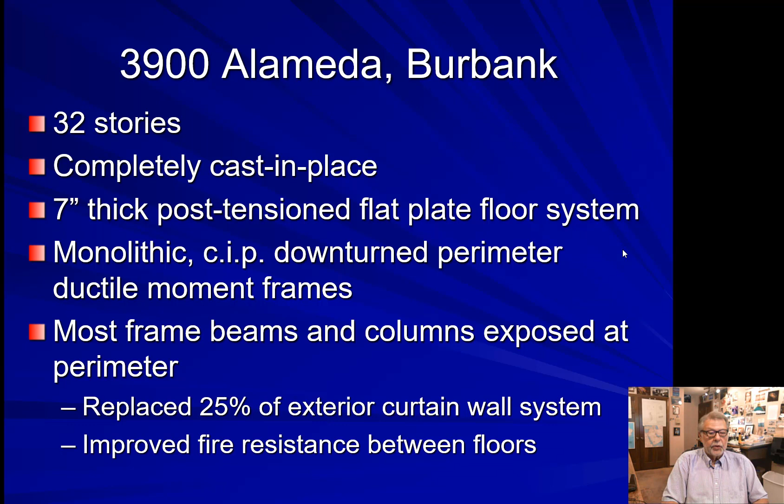The details of 3900 Alameda: it's 32 stories, completely cast in place. It has a 7-inch thick post-tension flat plate floor system in the office floors, and beam and slab framing in the lower garage floors. The framing in the office tower is monolithic cast-in-place, downturned perimeter ductile moment frames, and most of the frame beams and columns are exposed at the perimeter. That replaced about 25% of the exterior curtain wall system and greatly improved the fire resistance between floors.

The other tall concrete building I'd like to highlight today is the Paramount Apartments at 3rd and Mission in San Francisco. It was completed in 2002. It features 39 stories. It is the tallest concrete building ever built in the most severe seismic design category, D, E, or F.

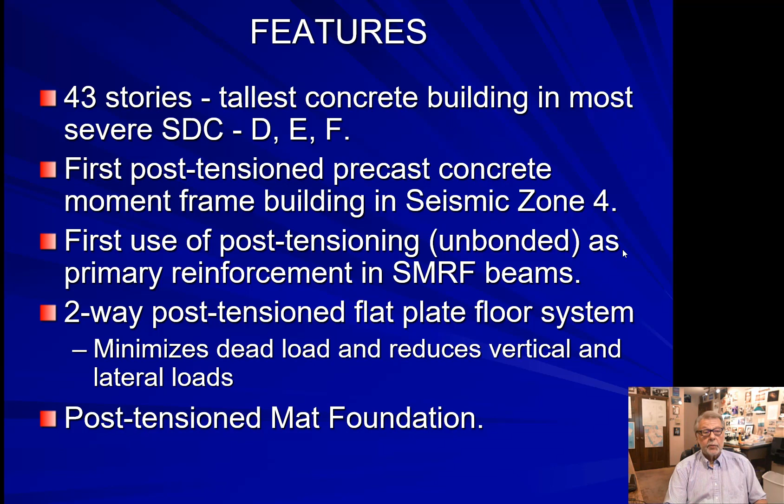It's the first post-tension precast concrete moment frame building in seismic zone 4. It has an exterior precast post-tension moment frame. It's the building with the first use of unbonded post-tensioning as primary reinforcement in the seismic moment-resistant frame beams. And it has a two-way post-tension flat plate floor system, which minimizes dead load and reduces vertical and lateral loads. It also has a post-tension mat foundation.

Coming to the end, I'd like to talk a little bit about careers in post-tensioning. The transition between a highly technical specialized construction form to an off-the-shelf commodity has taken much longer than we thought. Back in the 60s and 70s, we thought that in 20 or 30 years, the design expertise in post-tensioning would become widespread, becoming a kind of commodity, an off-the-shelf item like mild rebar.

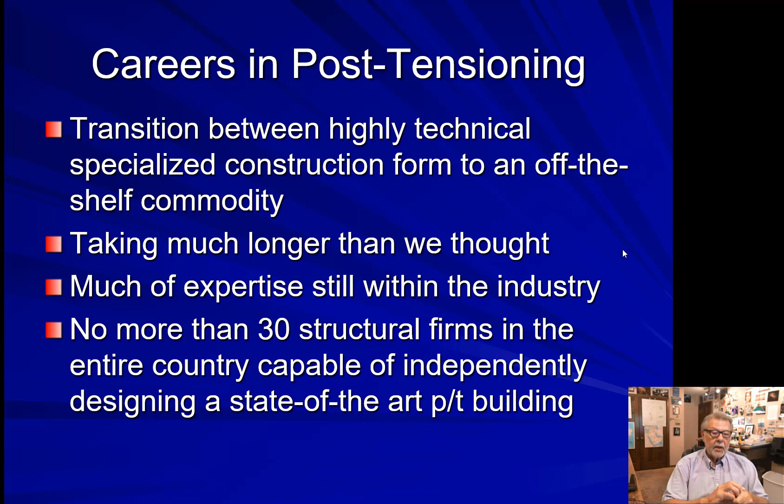That has not happened. That transition is taking much longer than we thought. Even today, much of the expertise is still within the industry. Based on some very reliable sources, I can state that no more than 30 structural engineering firms in the entire country today are capable of independently designing a state-of-the-art post-tension concrete building without help from the industry.

Part of that problem, part of the reason for that problem, is in the education system in our universities today.